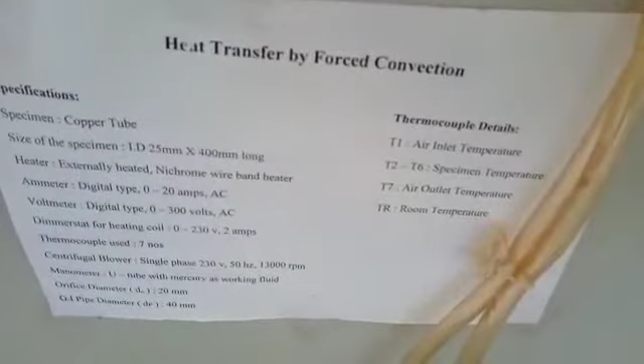externally heated nichrome wire band heater. Ammeter is digital type, 0 to 20 amps AC. Voltmeter is digital type, 0 to 300 volts AC. Dimmerstat for the heating coil is 0 to 230 volt and 2 amps.

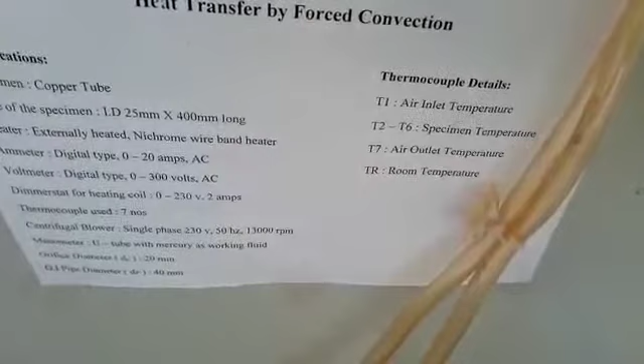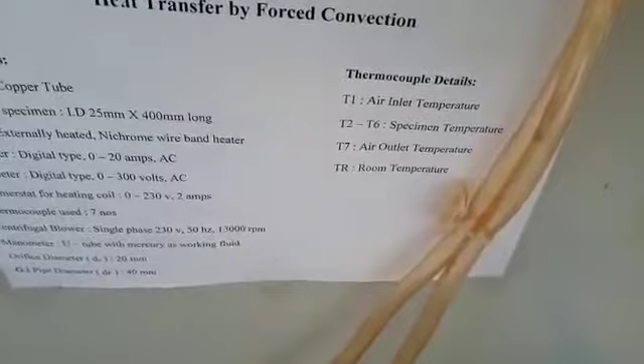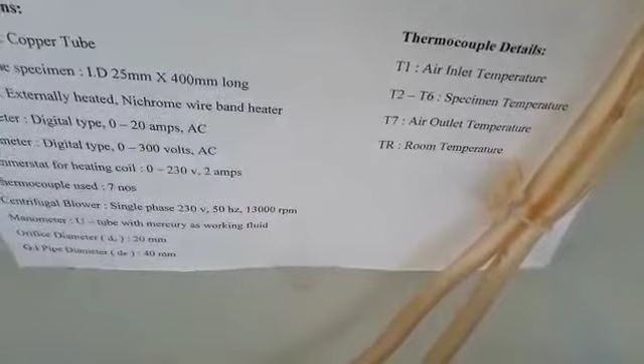Thermocouples used are 7. Centrifugal blower is used, single phase 230 volt, 50 hertz and 13,000 RPM. Manometer is a U-tube with mercury as working fluid, and orifice diameter D0 is 20 mm, and GI pipe diameter DP is 40 mm.

T1 is air inlet temperature, T2 to T6 are the specimen temperatures, T7 is air outlet temperature, and TR is room temperature. This is about the specification.

Coming to this, first one is orifice brass of diameter 20 mm and thickness 3 mm. Second one is a 40 mm gate valve. This is a gate valve of 40 mm.

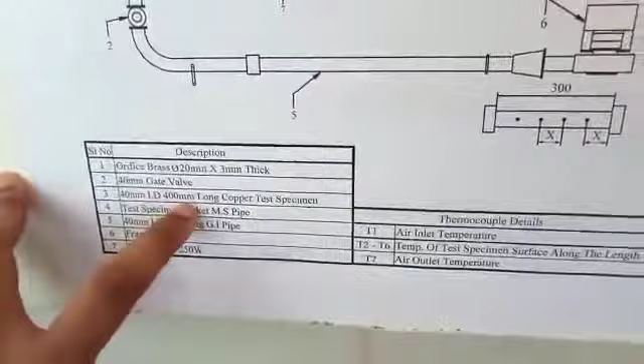Third one is a 40 mm diameter and 400 mm long copper test specimen. This is the specimen.

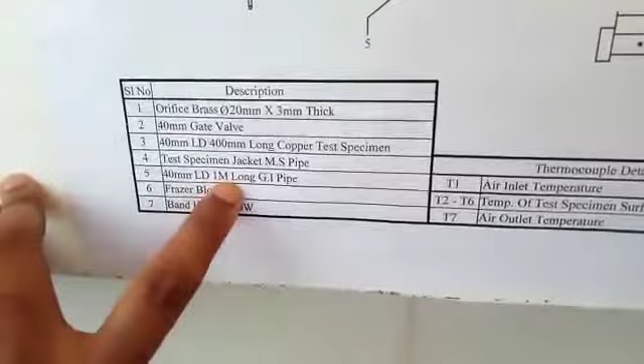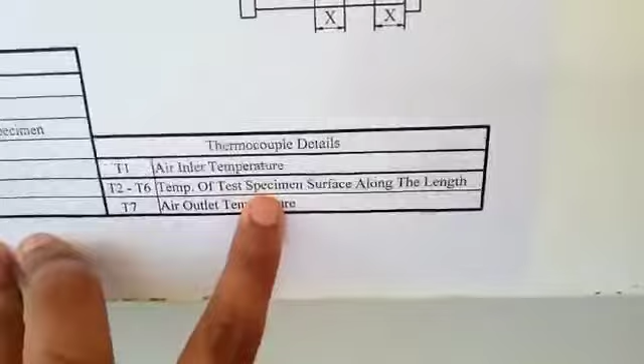The fifth one is 40 mm diameter and 1 meter long GI pipe. Sixth one is a Frazer blower, and seventh one is a band heater of 250 watt capacity. T1 is air inlet temperature, T2 to T6 is the temperature of the specimen surface along the length, and T7 is air outlet temperature.

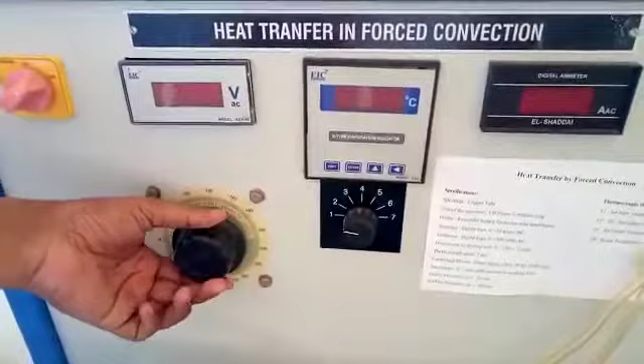Switch on the mains and set the dimmerstat at some constant value, and leave it for some time until it reaches equilibrium condition. Before switching on the blower, note down the manometer reading.

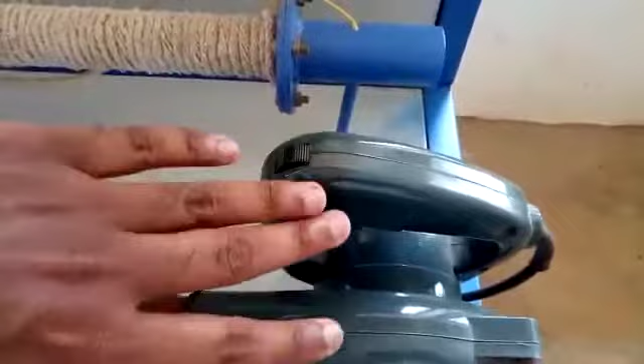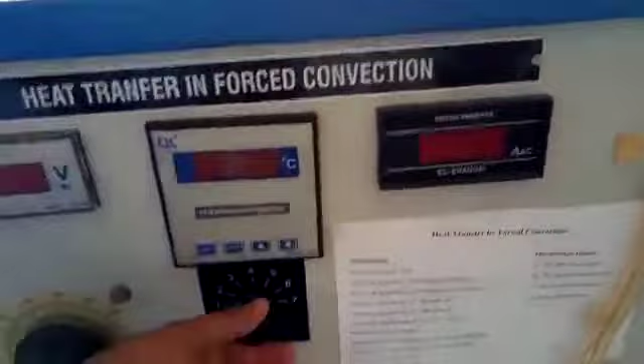After that, switch on the blower and maintain it at constant speed, and note down the manometer reading. After that, note down voltmeter and ammeter readings and temperatures T1, T2, T3, T4, T5, T6 and T7. Note down all the temperature readings.

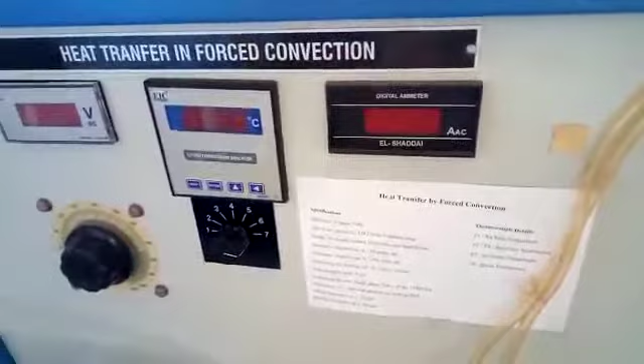This is about the procedure, and repeat the experiment for different heat input flow rates. This is about heat transfer in forced convection procedure. Next, coming to calculation.

T1 is the air inlet temperature, T2 to T6 is the specimen temperature, and T7 is the air outlet temperature. Note down the voltmeter reading and ammeter reading. V into I you will get.

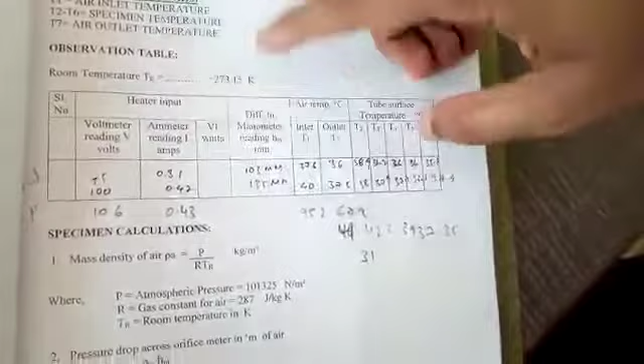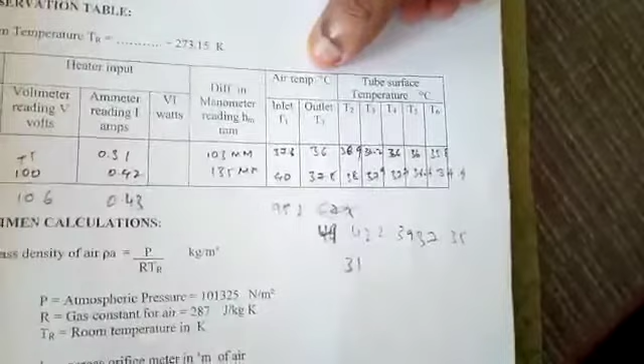After that, difference in manometer reading, HM. After that, air temperature - air inlet and air outlet temperature - note down all the temperatures, and the tube surface temperature, T2, T3, T4, T5, T6. Note down all the readings.

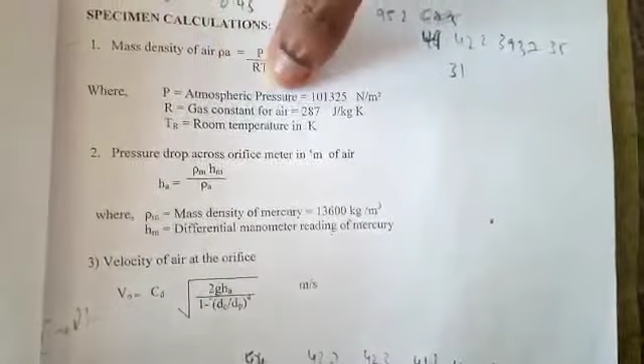Coming to the calculation part, mass density rho A is P divided by R into TR, in kg per meter cube. Here P is atmospheric pressure, 101,325 Newton per meter square, and R is the gas constant for air, 287 joule per kg Kelvin, and TR is room temperature in Kelvin.

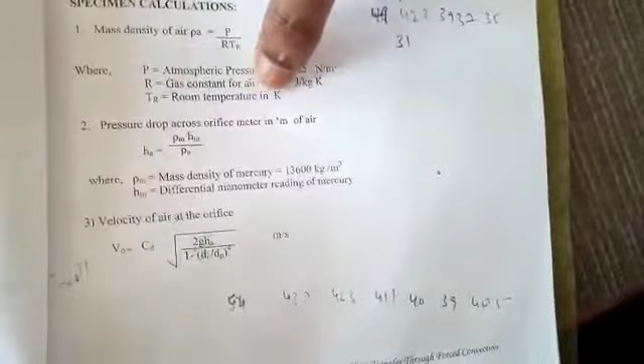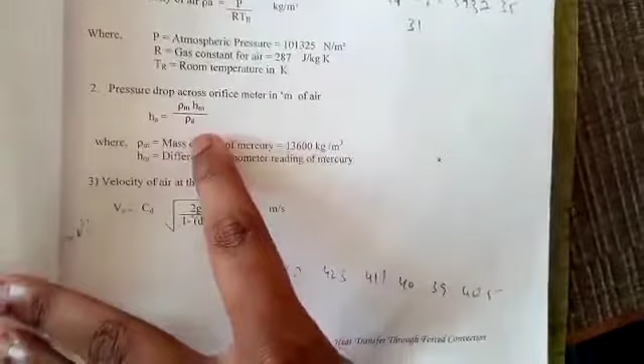Pressure drop across the orifice HA equals rho m into HM divided by rho A. Rho m is the mass density of mercury, 13,600 kg per meter cube, and HM is the differential manometer reading of mercury.

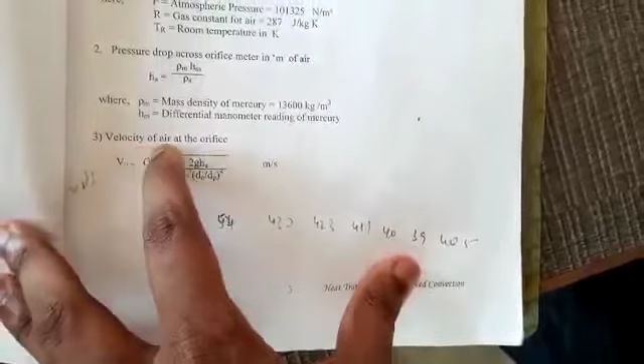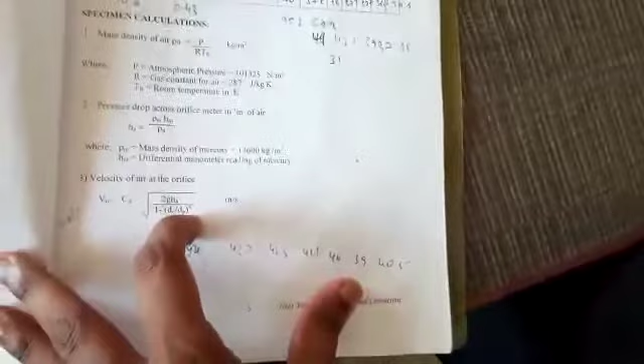Next part is velocity of air at the orifice: V naught equals Cd into square root of 2g HA divided by 1 minus (D0/DP) raised to 4, in meter per second. V naught you will get.

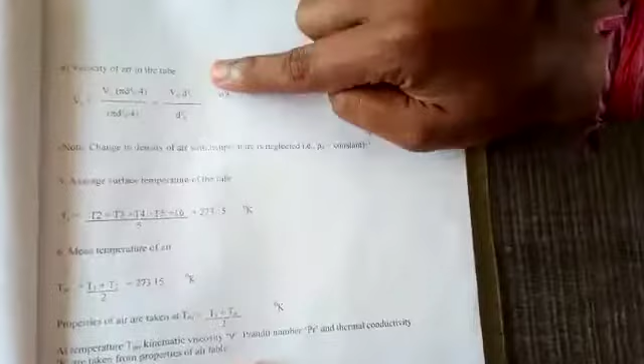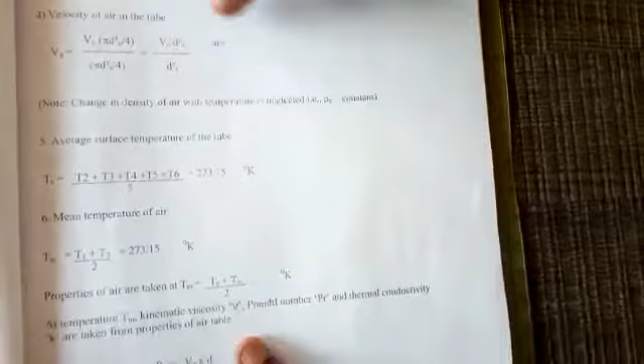After that, velocity of air in the tube. Va equals V naught into pi D square divided by 4 divided by pi Ds square divided by 4, which equals V naught into D naught square divided by Ds square. So Va you will get in meter per second.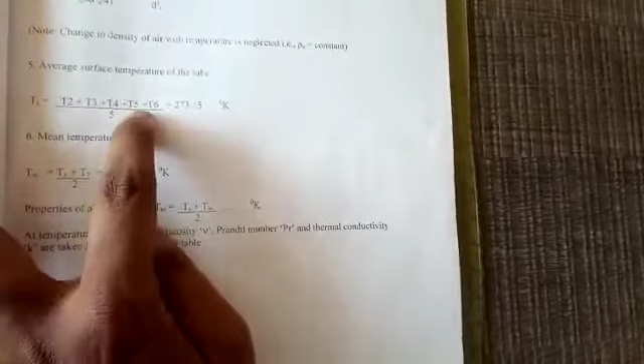Third one is the average surface temperature: Ts equals T2 plus T3 plus T4 plus T5 plus T6 divided by 5, plus 273. So Ts you will get in Kelvin.

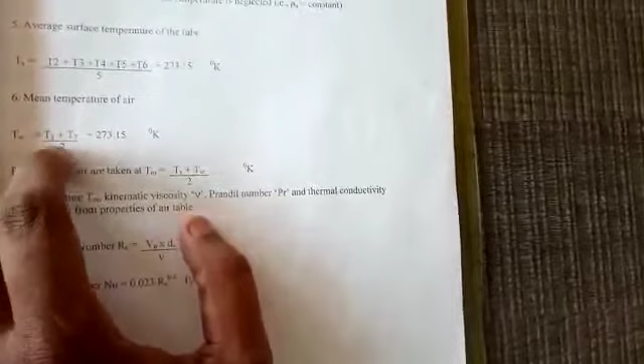Next part is mean temperature of air, T infinity: T1 plus T7 divided by 2, plus 273. So you will get the mean temperature in Kelvin.

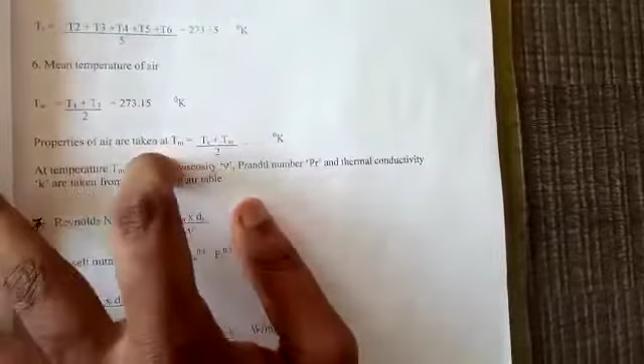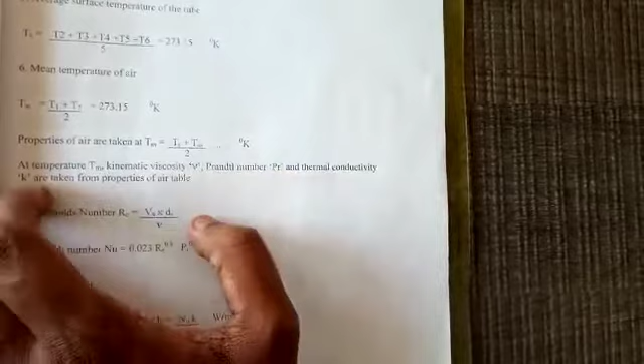After that, properties of air are taken at mean temperature Tm, which is Ts plus T infinity divided by 2, in Kelvin. At temperature Tm, the kinematic viscosity nu, the Prandtl number Pr, and the thermal conductivity K are taken from the properties of air table.

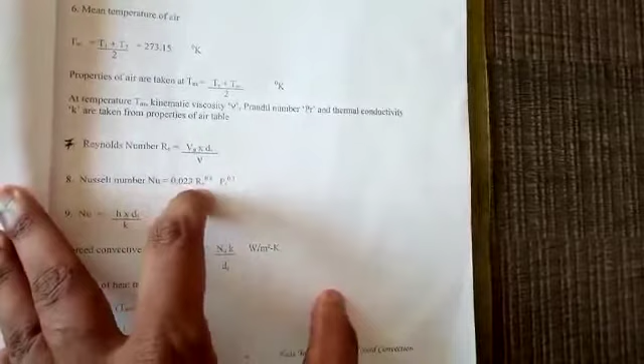Reynolds number formula is Re equals Va into Ds divided by nu, and Nusselt number formula is 0.023 Re raised to 0.8 and Pr raised to 0.3. So Nu equals H into Ds divided by K.

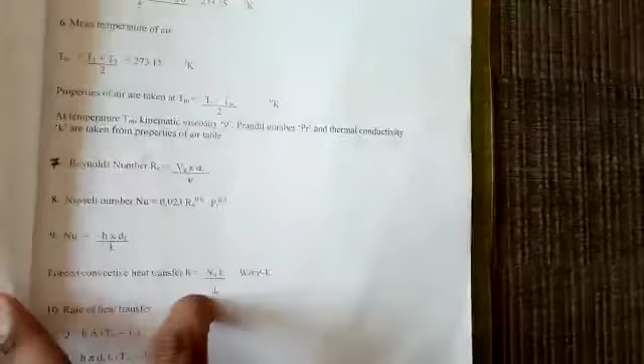For forced convective heat transfer, H equals Nu into K divided by Ds, giving watt per meter square Kelvin. So rate of heat transfer formula is Q equals Ha into T infinity minus Ts, so Q equals H into pi Ds into Ls into T infinity minus Ts. Q you will get in watts. This is about the experiment and calculation.